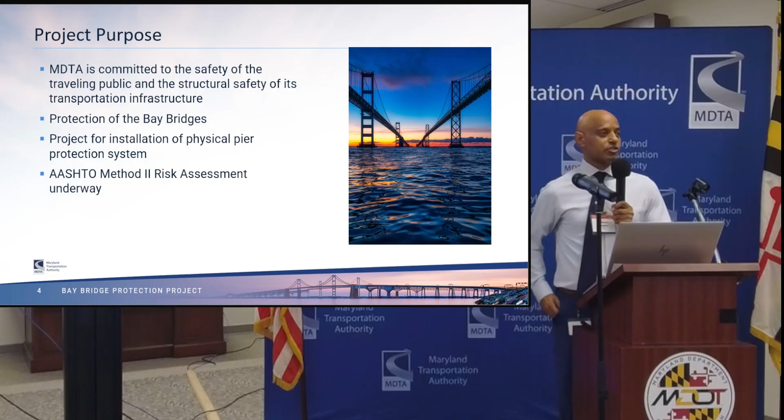As part of evaluating how we protect the bridge, we did an AASHTO Method II risk assessment, which is based on the guide specification put out by AASHTO to evaluate the risk and also design the appropriate amount of protection for that risk.

Here with us we have a number of engineers and contractors, marine and heavy civil contractors who've done this before. So the question is, how would you protect the Bay Bridge? We want you to take a look at what we have now, but also think about how you would protect the bridge if you have the opportunity to design and construct a pier protection system.

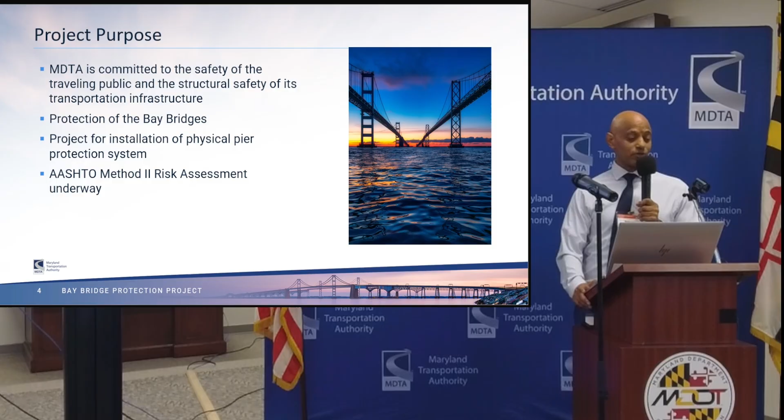How would you do it? How would you team? Who would you put on your team? And what are the design and construction methods you would use to make sure that at the end we have the best protection system for the bridge? So think about that while you follow along with the presentation. Our project goals - we have 6 goals as part of the project goal.

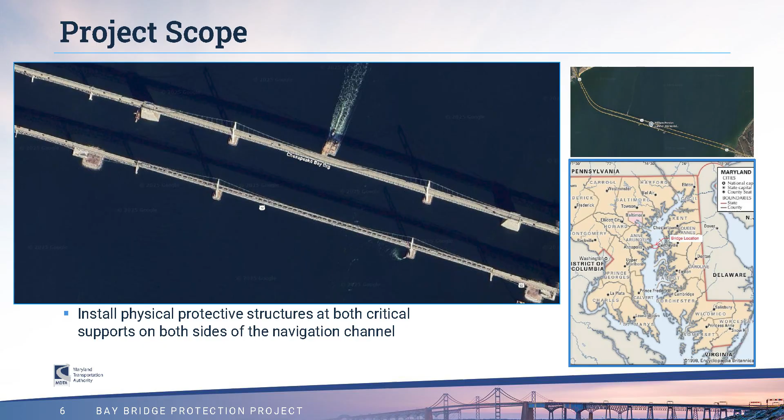So, project scope. We're talking about the Bay Bridge. As you can see in the aerial view, you see the Bay Bridge in the left big picture, and the focus of this project is the middle section of the bridge. As I told you, it's a 4-mile bridge, but we're focusing on the 1,600 feet long suspension span, and the adjacent span, so a total of around 2,100, if I'm not mistaken, Phil. So that distance between the anchorage is our focus for this project.

As you know, the Bay Bridge is not just one bridge, it's 2 bridges, one going westbound and the other going eastbound. And the westbound, which is the younger bridge, built in 1973, has 3 lanes, and the old one, the eastbound, is 2 lanes. So we have 5 lanes of bridge, 5 lanes of highway on this bridge.

So where are we installing these protection systems? We are focusing on the 4 towers. If you can imagine the Bay Bridge, the 4 towers that go into the sky at 350 feet above water, those 4 structures are the main supporting structure for the bridge. So we are trying to protect those. And basic information about the bridge is 185 feet above water, the deck level. And you can imagine 1,600 feet, 185 feet, that's your work area.

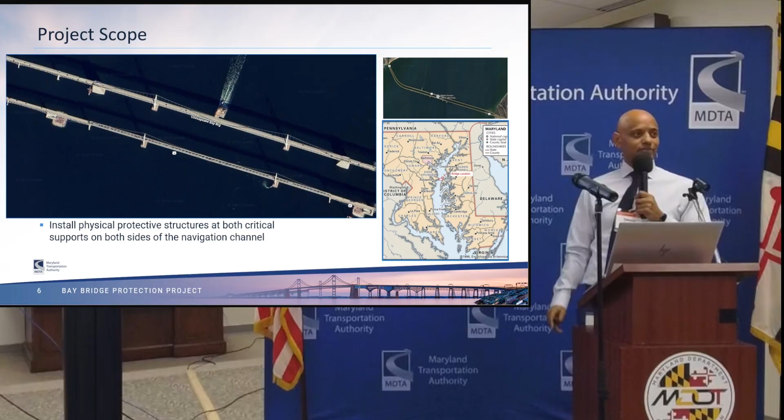That's just carrying the navigation channel. The navigation channel goes in the middle, so it's 800 feet. So that's where these big vessels go on. So you have about 400 feet on each side of the navigation channel to work on these structures.

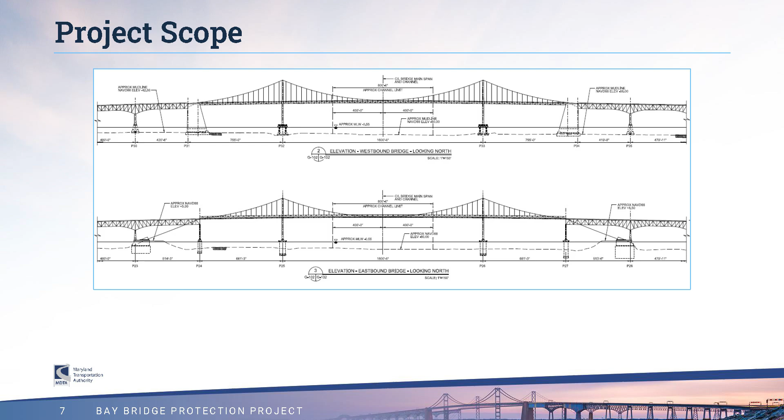This is an elevation view, so this is how the pilots would see it. Talking about those 4 towers that I mentioned, and more to the left and right, or the adjacent spans, we want to protect those as well. So that's a little bit of perspective for you. And the depth of water is around 50 feet, ish. So that tells you what you're gonna work with.

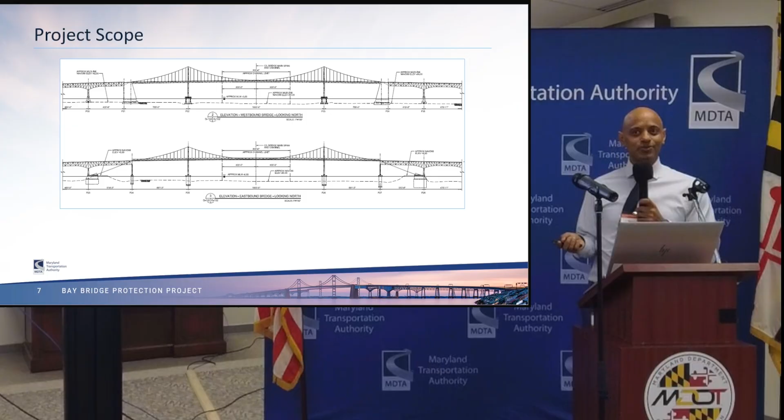The environment there is marine. Andy and Dan could tell you, the water, it's a challenging project. Working over water is completely different from working on highway. There's weather limitations, there's wind and tides and all that. So it's a very challenging project, but luckily we have a lot of experts here who's done this before. So we hope to get a strong team out of this crowd.

So what are the project considerations? As I said, the key thing is it's a water-based operation. So it includes using barge, driving of sheet piling, and large equipment, and maybe templates to help you guide those sheet piles into the water. Dredging may or may not be included, and part of this whole consideration could depend on the proposal of the contractor.

We're working on a navigation channel, so we have to be considerate and coordinate with the different stakeholders, like Maryland Port Administration, Maryland Association of Pilots, U.S. Coast Guard, Army Corps, and so on. We also have navigation, we will have navigation light on top of these protection structures. And last but not least, we need to think about the future bridge. So where we put these protection structures, we have to take into consideration the future bridge as well.

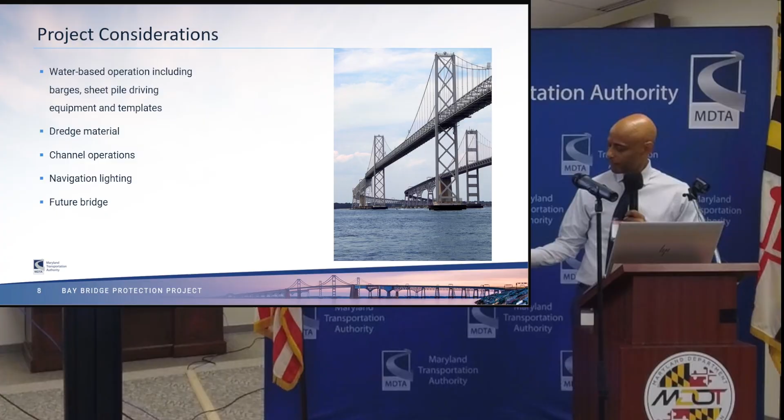While we do this, we need to comply with the MBE participation goals set for this project. This is 100% toll revenue funded, so it's state funded. It doesn't have DBE goals, but it will have MBE goals, and potentially VSBE goals. We have a few MBE firms here in engineering and construction, so that's an opportunity for you to connect with them and work with them to meet the goal.

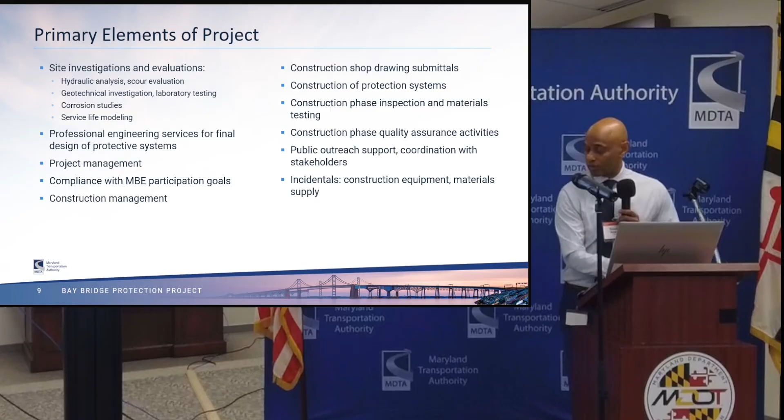Construction management, shop drawing submittals, and the construction of the protection system itself are part of this scope. As part of that, you need inspection, material testing, and maybe disposal, depending on whether we have material to remove. Quality assurance, and coordinating with MDTA on public outreach and stakeholder coordination. There may be other things too, like equipment and material supply. So this, I hope, gives you an idea of what the scope is about.

Let's go to project requirements. First and foremost, the design builder must demonstrate that they have the capacity and experience necessary to undertake this very unique project. It requires a fleet of marine-based heavy equipment, which makes it very specialized and a very important factor. Additionally, the design builder shall be...

...registered with MDE, with what's called the Marine Contractors Licensing Board. We found a list of contractors as we were preparing this invitation by going to that website and looking at who's registered. There are four tiers of registration, and this will be for category 1, which is heavy marine heavy civil construction. So make sure your firm is registered. We're talking about the prime contractor.

Today is more of an overview, but details about the project will be available to you in the upcoming solicitation documents. We will be issuing and advertising a request for proposal. You'll get the details there.

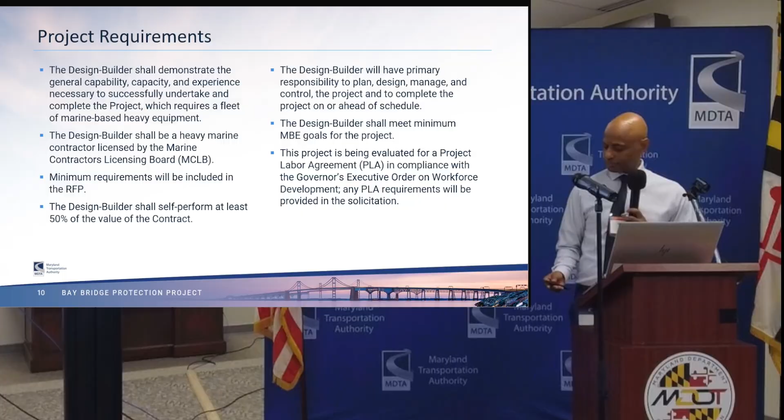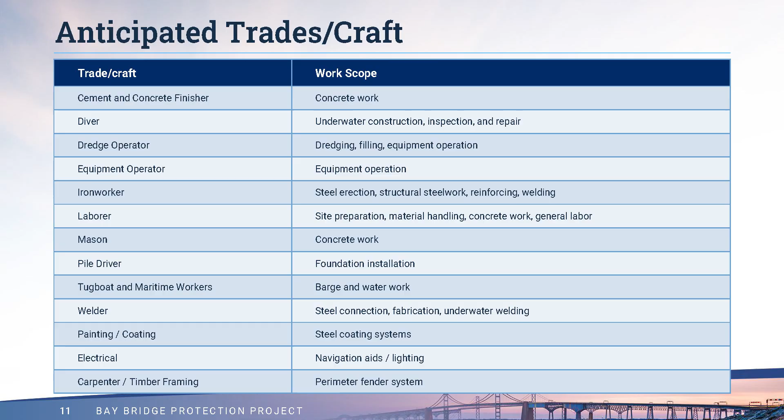Okay, we talked about the work. Who's going to do it? We have a list of what we assume to be the trades and people that will be employed here. Obviously, cement and concrete finishers for concrete work, divers for underwater inspection or construction and repair, a dredge operator for dredging, filling, and equipment operation, and equipment operators for large equipment like cranes and barges.

Iron workers for sheet piles, steel erection, and maybe templates for the sheet piling, doing welding and reinforcing as needed. Laborers for different types of work. Masons for more concrete work. A pile driver, which is going to be a big part of the work - pile driving.

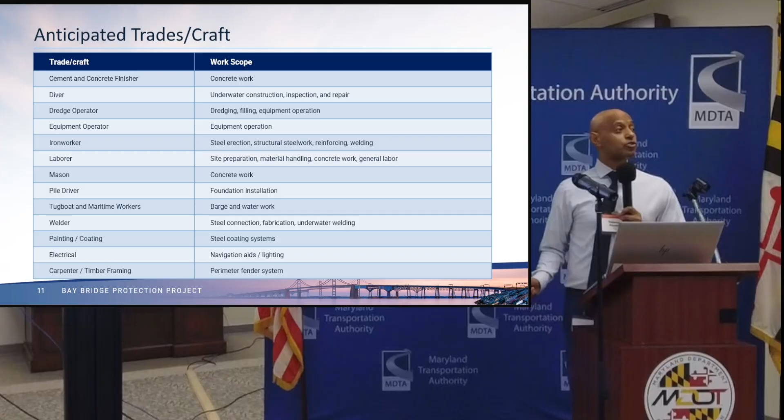We anticipate very large structures here, and with that, maybe a large number of pile driving associated with this work. Tugboat and maritime workers to handle the equipment on water. Welders for steel-related work. Painting and coating - we anticipate coating of a portion of the steel piling. Electrical work, as I said earlier, for navigation lighting, so we need electrical personnel for that, and carpenters or timber framing for the fender, which we anticipate around these protection systems. So as part of this industry forum, reach out to those who can provide these services, personnel, and equipment.

Stakeholders who have a stake in this project include the maritime industry, waterway users—commercial or recreational—and the public and residents. The Maryland Association of Pilots is a big stakeholder, as is the Maryland Port Administration, the United States Coast Guard, the United States Army Corps of Engineers, the Maryland Department of the Environment, and the Department of Natural Resources. Those will be stakeholders related to permitting and other coordination. NOAA is also part of that, along with the Federal Highway Administration, since this is protecting a highway bridge.

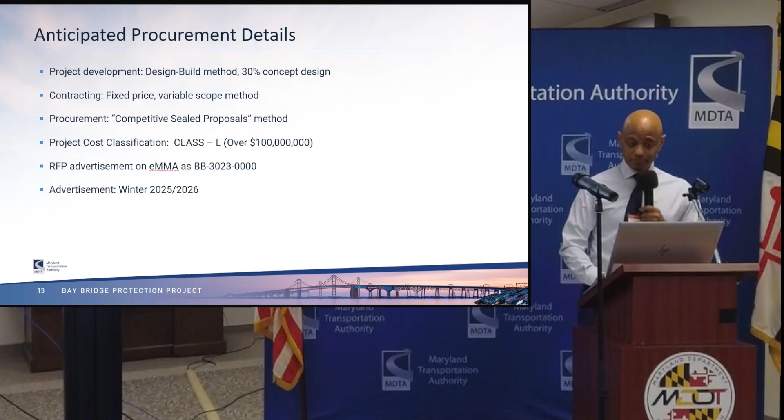The RFP is anticipated to be advertised as contract number BB30230000 by the end of the year—that's the schedule. Advertising by the end of this year, proposal due around spring of 2026. We anticipate notice to proceed in the fall of 2026, start of construction in spring of 2027, and completion by winter of 2029. So that's the schedule, giving at least two years for construction and maybe six months for design.

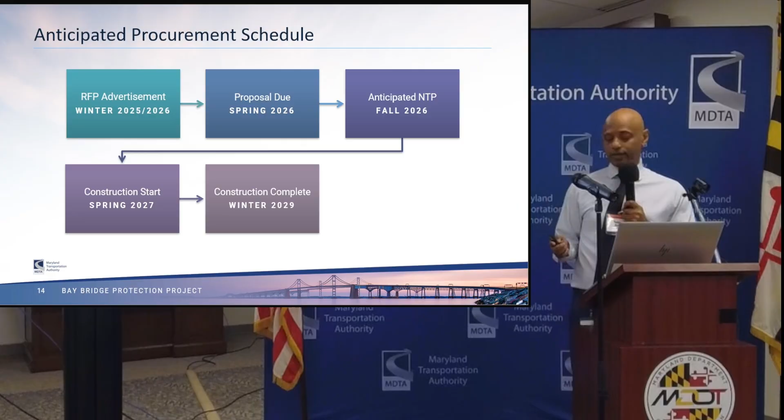Don't know if we have anyone from Civil Rights Fair Practice here, but I think Alice was here. As I said earlier, as a state-funded project, MBE goals will be part of this solicitation, and potentially VSBE firms.

The list of attendees today will be posted on the project website, and we'll send you an email later. If you came in today but didn't register or provide your email, please send an email to that address so we can include your name and contact information and post it on the project website. We encourage prime firms to look at the MBE lists in addition to this in-person coordination and networking, and to check the certification information available on that website. There may be some new things with the certification, so take a look, and contact our Office of Civil Rights and Fair Practices if you have any questions.

We have a couple of teams here—WSP, Moffatt & Nichol, and TranSystems—who will be part of this project's development, so these firms will be precluded from participating as a design-builder or as part of a design-build team. But always check to make sure your teaming is not conflicted for conflict of interest.